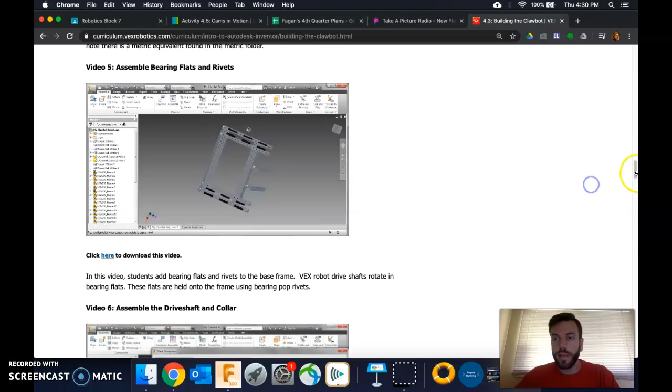The next step with your Clawbot or robot you're building virtually might be adding bearing flats, okay? Like you see in this video here, which I'm following from the Vex website. This is video 5, and on that Vex content website, it is 4.3, all right? So you could Google that, Vex EDR 4.3. But, of course, his is for Inventor. I'm showing you with Fusion 360, okay?

So, what you'll see I've got going here, I'm gonna click home, is I'm beginning to add bearing flats to my robot. In the end, you will need 12 for the Clawbot, right? It's 3 on each side, essentially 3 on each chassis rail, okay? But I want to show you a trick to make it a lot faster using the rectangular pattern, okay?

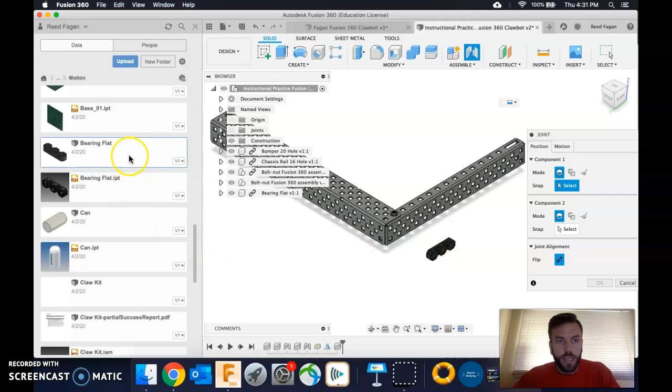So I've already gotten this in here. I right-clicked, said Insert in the current design, and you only have to do 1 of those, okay? Because you'll see it's going to replicate itself as I do the rectangular pattern. But yeah, just start with 1. I've already started my joint. I haven't picked it yet, but I wanted to show you what the process of getting this centered could look like.

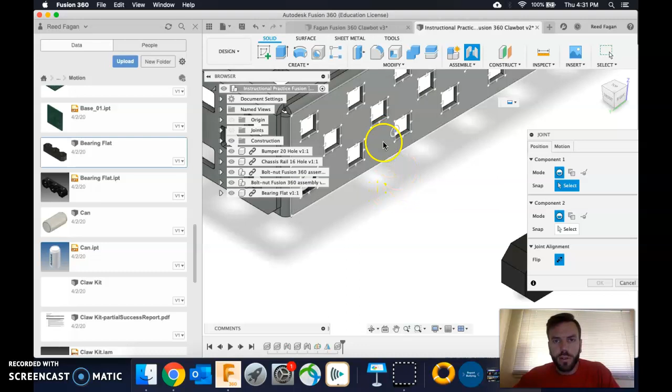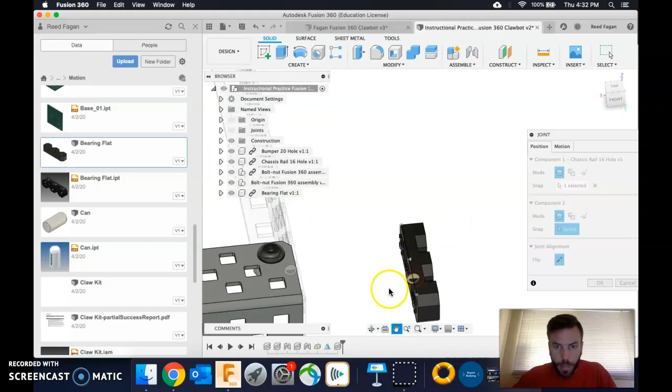So yeah, one thing I want to join is this face right here. It's the second hole in of the middle holes, all right? Not the top, not the bottom, the middle holes. And I want that to join to, if I zoom out, basically the back side of this thing. Okay, hopefully I can do this somewhat quickly. And I want it to join to basically this face right here. Okay, so I'm going to click join.

And of course, since I clicked that second, it moves the bar towards the nut. But what will happen is, since I've got a piece grounded, it's going to actually move it back once I say OK. All right. But the first thing you click always, the second thing moves to that first thing. OK. So anyway, you might be like, whoa, how can I tell if this is really a good join or not? Well, check this out.

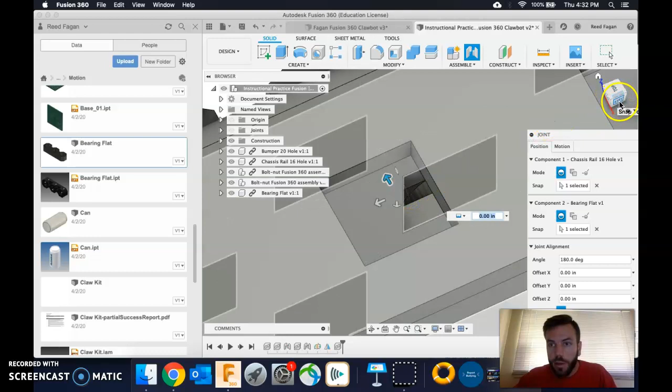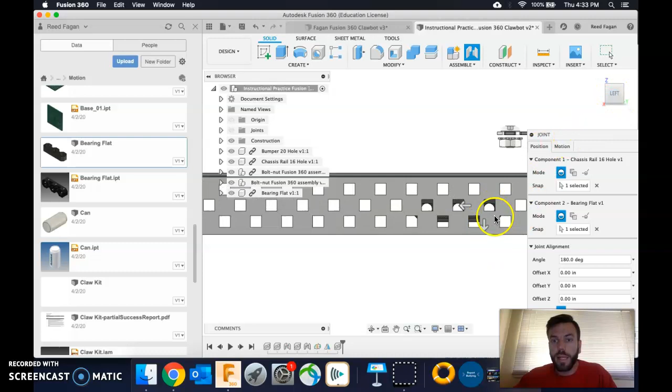Let's go to the right view here, my view cube. All right, or left view, I guess. And I know we can't see right now, so let's get recentered here. Okay. Yeah, like I was saying, go to left view. And when you do it square on like this, it'll let you really tell if it's lined up or not, okay, which I've gone over in another video. But basically, I'm just going to raise this up a little bit, or I guess lower it, okay, and then bring this over just a bit. All right, that looks good to me. I'm going to click OK, and I got it set.

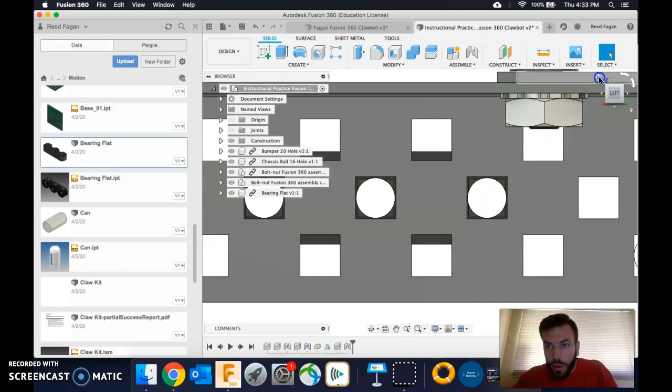Sometimes when you go to do that, you might have to flip it, which is in the bottom left part of that box that was open. You can reverse real quick or rewind this video and see where that flip is, the very bottom. But you might have to do that sometimes. Anyway, so I've got that there. Okay, great. And it is locked into place. Like if I try to move this thing, it's not going to move.

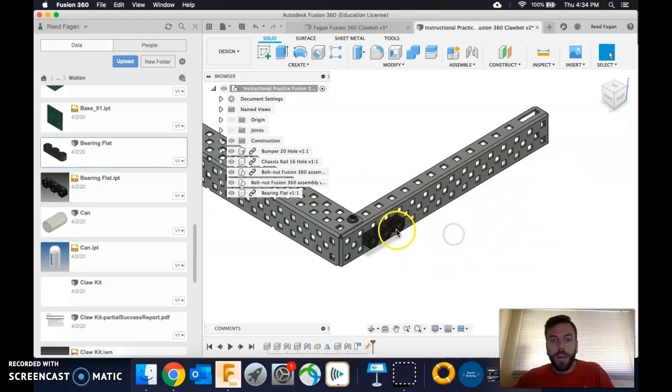Oh, this thing is not grounded. So let me fix that by doing this and ground. And we'll say capture position. Okay, and so now if I grab this, yeah, it's not going to move. It's fully constrained. Okay, but I need to get 2 more of these things on here. What's the quickest way to do it? Here it is. You're going to go to a rectangular pattern. If it's not visible there, go to create and find it from there. I'm going to minimize my data panel so I have more space here.

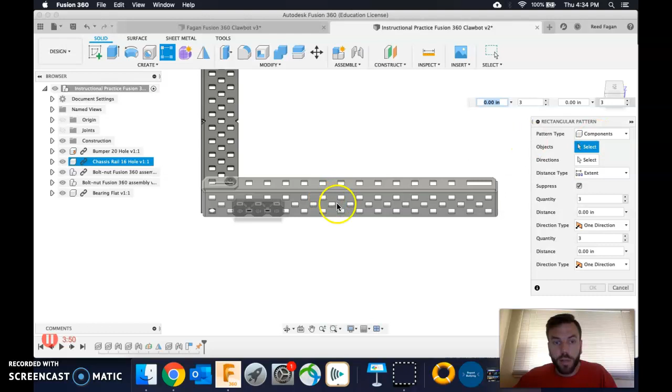And let's get lined up on the right side so I can really see what I'm doing. I kind of like to be at an angle sometimes so I can get a little more than one view. Here's what I want to do. I want components for my rectangular pattern, okay? And the component is specifically this one. And what I can do is I want 3 of them. That's right. Basically, if I get this right, I can actually start. Okay, so I got the component.

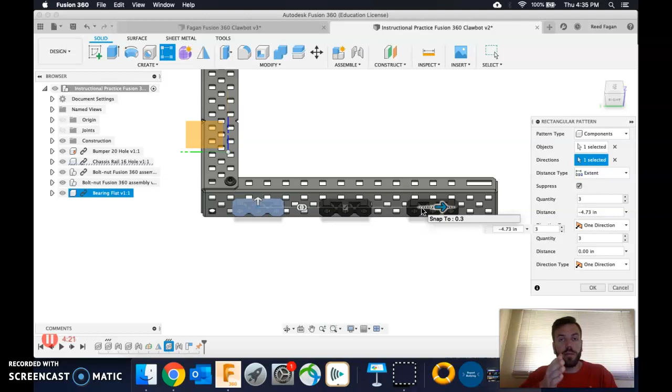Click on directions, and I can even start dragging this thing to tell it the direction. And check that out. Because the quantity 3 was picked, I have the 3 that I need. All right. Finally, the nice thing about Vex is the holes are exactly a ½ inch apart. The holes are ½ inch apart from each other. So I know this has to be 5 inches. Okay. Hit enter, and boom, you've got them really quick.

Last thing is these are not constrained, unfortunately. All right. So you'll see if I zoom in. And I'm going to do this from the back side. So bear with me for a sec here. We're going to take a little ride. Left. Okay. Oh, actually, kind of can't see anything right now. Let's get around there. Okay. Left.

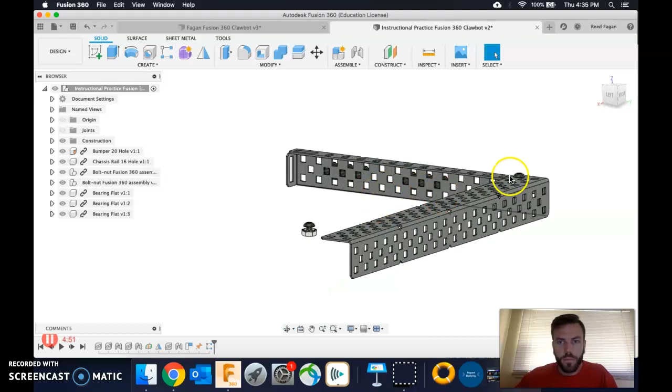Those are not constrained, which I could tell because, like, watch this. I can, hopefully through this thing, move it. See, so that's the one problem, but that's an easy fix. You don't even have to move it very much. Just hit J and go ahead and capture position, because otherwise it's going to move back to however I moved it from last time. And yeah, just do what we did before.

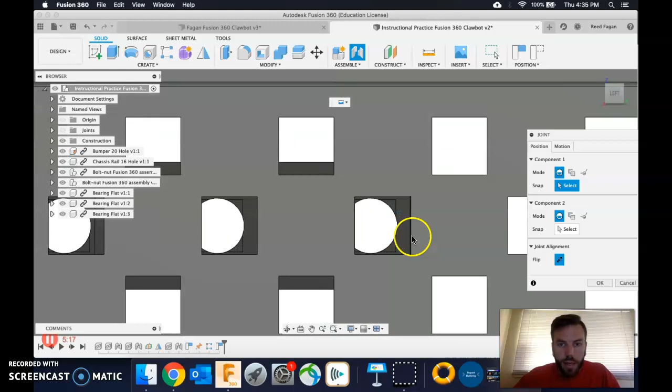And since they're already lined up, it's just really easy to join these together. All right, so I want that to join to, spin it back this way a little bit, just very slowly. And here's a trick. If something gets in your way visibly, watch, well, let's see, can I do this right now? No, that's not gonna let me do it right now, but I'll show you another trick in a sec. We gotta finish this up, so let's zoom in here. Oh, now I've made it angry. Okay.

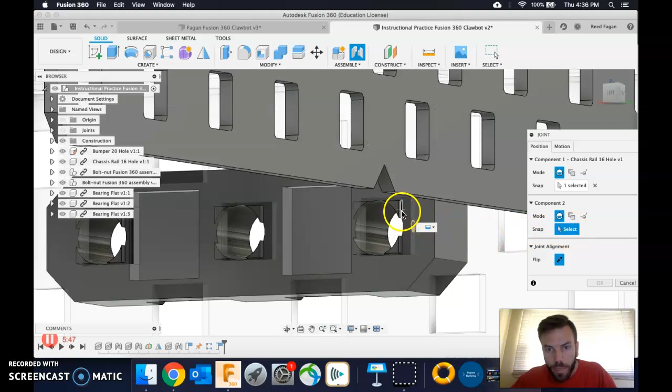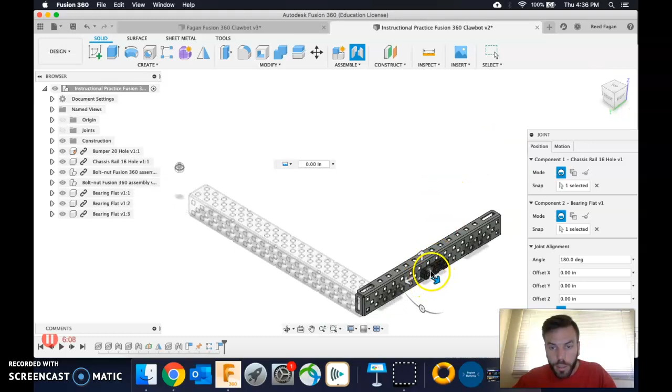There it is. All right, now it's joined, and again, just go square view, and get that thing centered. All right, let's see. Sometimes it's easy to lose where you are. Yeah, so let's do right, so we can kind of see if it's centered. All right, looks like we need to move that down a little bit. And hopefully side to side it's pretty good. Looks like maybe there. Okay, it's clear circles all the way through. So then, yeah, I've got that. So it's actually a pretty easy process to join those.

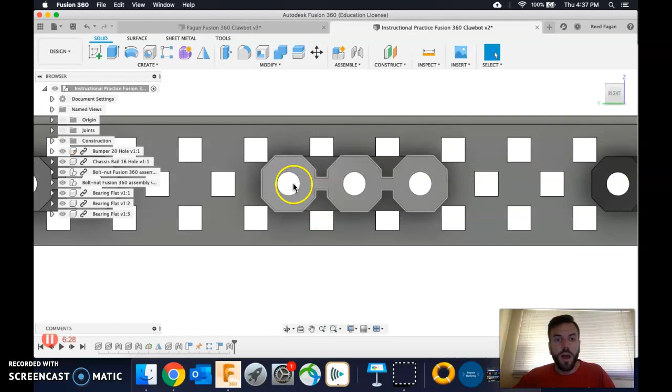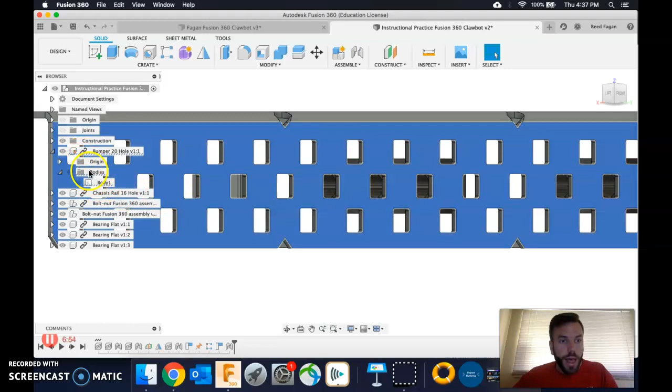But one last tip, if you're trying to do something like I was just doing there, let's put it at this angle. And this is like something is blocking your view as you're trying to line up and do your joint. All you have to do is click on that item that's in your view. Right click on it and say find in browser. So it's gonna open up what they call the children from the parent for that. And wherever it does that, you can just click on the eyeball and it's gonna make it disappear.

All right, so now we're actually looking through it. I know it's hard to tell, but we're looking straight through that thing at the other chassis rail with the bearing flats. Okay, hope this helps. Make sure you get all 12 on there, and then we'll see what happens next.